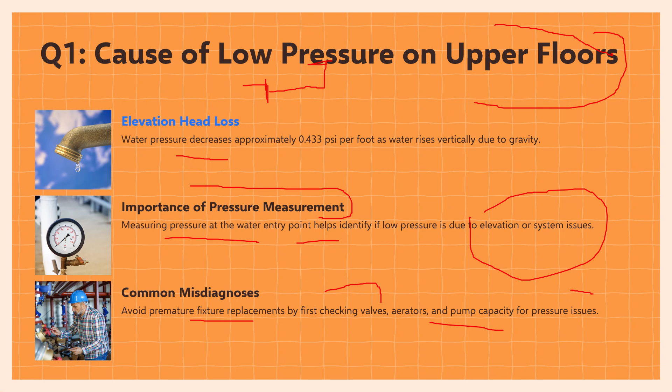Common misdiagnoses: you should avoid premature fixture replacements by first checking the valves, aerators and pump capacity for pressure issues, because sometimes the water is not reaching the top floor because the system has some air trapped inside it. So start with the calculation, start with the valve openings, and check if there is some air trapped in the piping or not. All these things will help you towards the correct analysis of low pressure at upper floors.

Moving on to the next slide. What is the cause of pipe banging when a washing machine stops? This question addresses the classic plumbing fault known as water hammer. Guys, you would have seen that when we stop a valve suddenly, there is a sudden movement in the pipe and the pipe starts hammering. That is called water hammering.

Water hammering occurs when rapidly closing a valve, such as in washing machines or dishwashers. The sudden closure of valves sends shocks to the system because the water flow is stopped abruptly. It generates a high pressure shock wave that travels through the pipe network. This is a surge, and because of this surge there is a loud banging or rattling sound.

You would have seen the pipe start banging, or a rattling sound occurs. Because of this, the stress in the pipes can be very high, and it can damage the pipe fittings and loosen the fasteners over time. So this is the problem. So what is the solution?

The correct solution is installing water hammer arresters. When you install water hammer arresters near fixtures, it will stop the problem and ensure that proper air cushioning is there to absorb the surge. The explanation also reinforces the need to check for excessive static pressure, which can aggravate the issue.

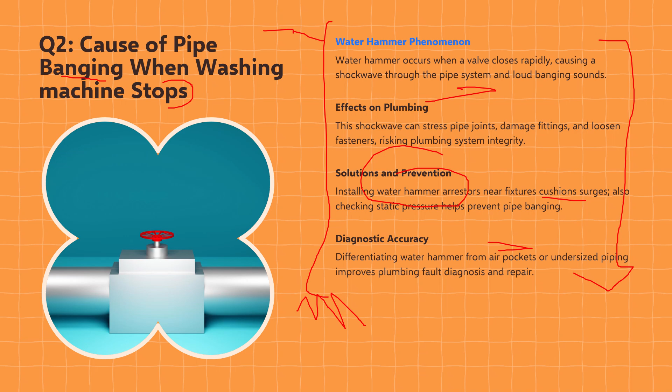Moving on to the next slide. So what is the source of bathroom odor without leaks? You would have seen a few bathrooms where there is a very dirty or bad smell coming, and the leakage is not physically seen inside the bathroom. So the slide focuses on diagnosing the severe odor problem despite the absence of a visible leak. There is no leakage seen, but the smell is there.

So the correct response, when this question is asked to you in an interview: the trap seal retains 2 to 4 inches of water to block sewer gases and prevent bathroom odors effectively. So you should use this trap seal. If the trap dries out due to evaporation, siphoning effect or poor venting, the odors escape into the room. So if the trap seal is not working properly, the odors will be in the bathroom.

So technicians must verify vent lines for blockages. You must check the vent lines for blockages by debris. Sometimes the vent lines get blocked by debris, maybe stones or some other particles, bird nests, or improper installation can be an issue. The explanation highlights the importance of trap primers. Trap primers keep floor drain traps filled with water, especially in seldom used bathrooms, preventing odor issues.

So replacing S traps with P traps is also a solution. It also discusses the consequence of S traps, which are prone to self-siphoning. S traps are self-siphoning and lose their water seal. Replacing them with P traps ensures stable water retention and odor control. So this can be a solution at a later date, maybe if you find something not correct in your investigation.

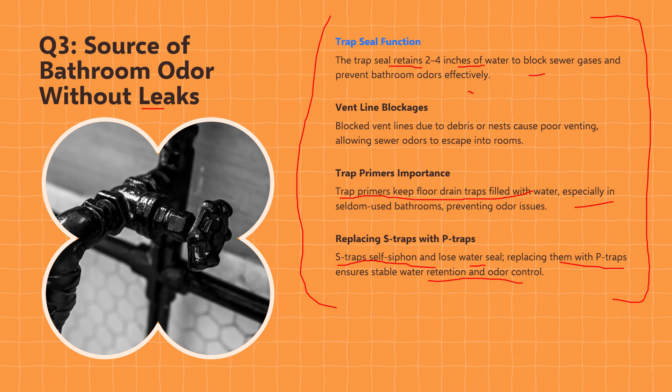Moving on to the next slide. So the question is, you would have seen a shower become cold when someone opens another tap. It's a very common problem, and people generally come out for this problem. So this question is a pure example of pressure imbalance as the root cause of sudden temperature shift in showers. When pressure changes between hot and cold water lines, it causes sudden shower temperature fluctuations

during fixture use. When another fixture opens, pressure distribution between hot and cold lines changes, which causes thermostatic mixing valves to deliver fluctuating temperatures. It's a very normal issue, but customers are certainly not liking it. The explanation is that mineral buildup in check screens or partially restricted hot lines can worsen the imbalance. So thermostatic mixing valves can provide a solution by maintaining a preset temperature through internal sensors and regulators.

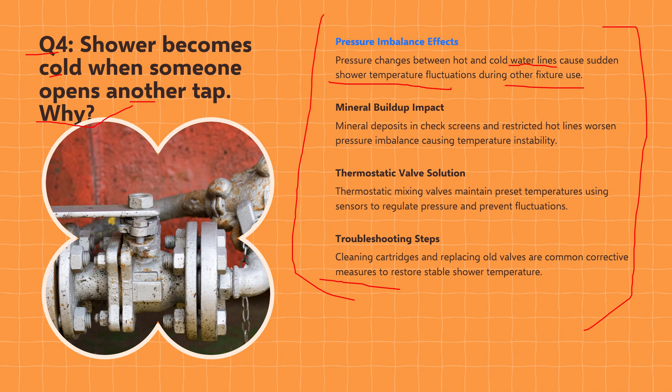So being a candidate, you should learn the mechanics of mixing valves. Mixing valves are a very important thing. Learn the effect of differential pressure on blended output and common corrective steps such as cleaning cartridges or replacing outdated valves. Because of this, you will understand both hydraulic behavior and fixture level troubleshooting. I hope this is clear, because this is a very general problem which comes into the picture day in, day out. Moving on to the next question, guys.

So what is the cause of pinhole leaks, in copper pipes especially? The problem is corrosion. Copper is a very sensitive material. Pinhole leaks result from erosion and corrosion caused by high velocity fluid movement, poor fittings, and improper water chemistry or imbalances. Early warning signs include blue-green stains on the copper, metallic water taste, and localized dampness around the pipes. After this the pipe is going to get a pinhole; that is the warning sign.

Preventive solutions can involve repiping with type L copper or PEX and maintaining flow velocities below recommended limits. Then the velocity will be less, the debris movement will be less, and your pipes can stand longer. Moving on to the next one.

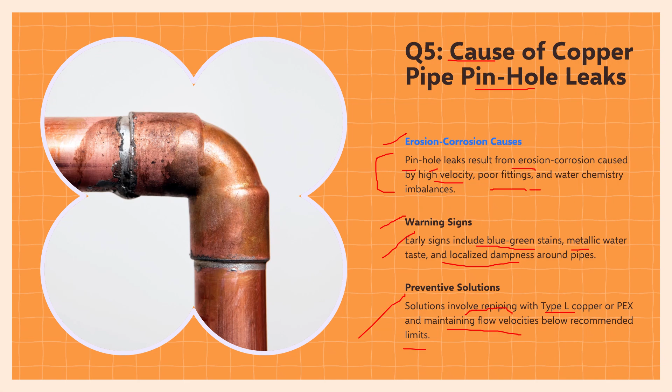So first test for electric heater with no hot water. This slide covers the diagnostics for electric water heaters that stop producing hot water. So you have to check it. The correct answer is, you have to test the heating element resistance. It represents a standard electrical troubleshooting step. So this is the first step, we can get it done with the help of an electrician.

The explanation basically tells you how heating elements fail due to mineral scale buildup. You would have seen the heating element rod or electric rod gets that mineral scale built on it. Overheating can be an example, aging, or loss of heating function. So all these things can happen.

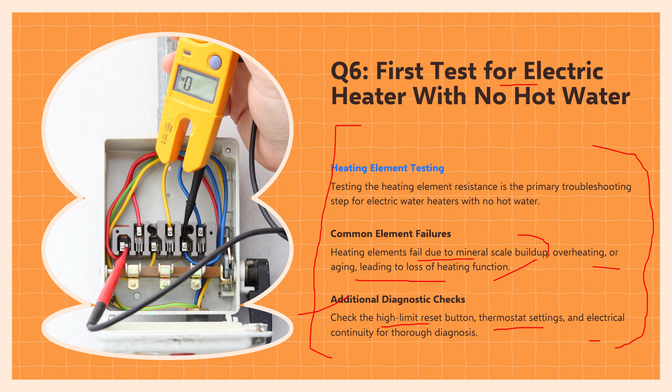Additional diagnostic checks: you check the high limit reset button. That is very important. Thermostat settings are important because then the cutoff will be at the correct temperature, and electrical continuity for thorough diagnosis. But again, being a plumber, I don't know if we should really get into this, but you should take the help of the electrician, so that there is no issue in getting the hot water out of your electric heater. Moving on to the next one.

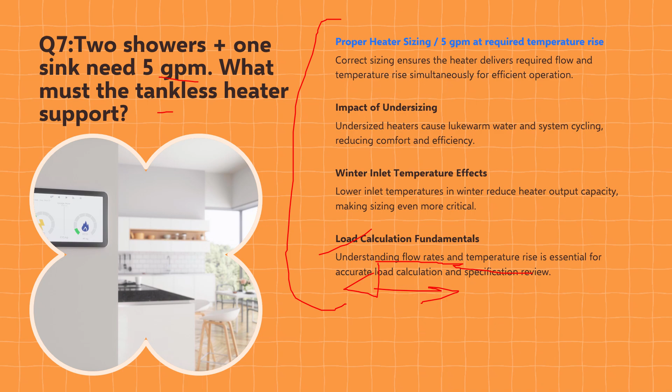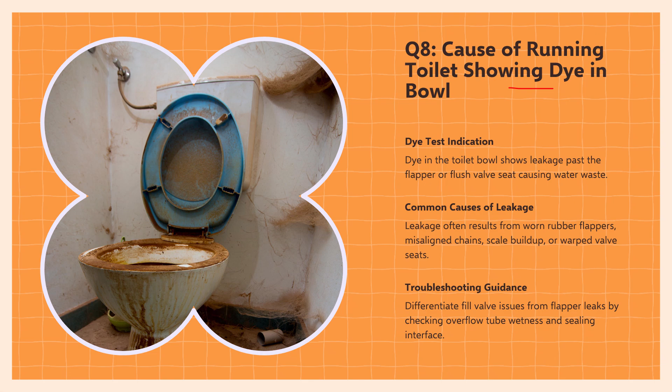As a candidate, you should be able to differentiate between fill valve issues associated with overflow tube wetness and flapper problems, which affect the sealing interface directly. This question is very important, because it promotes essential troubleshooting in common residential plumbing fixtures. You should be aware of it, because people will generally come to you with these sorts of problems, in residential plumbing fixtures at least. Moving on to the next and the last question for today.

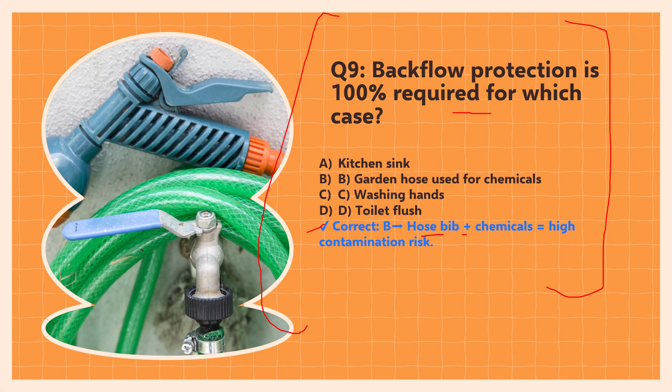If not, there can be high chances that your potable water gets contaminated. You should be able to identify high hazard situations and understand the critical public health protections mandated by the plumbing codes. If you are not aware of the plumbing codes, you should go through them first, and then start your job. So these were the questions we wanted to discuss today. If you have come till here, I guess you would have learned something.